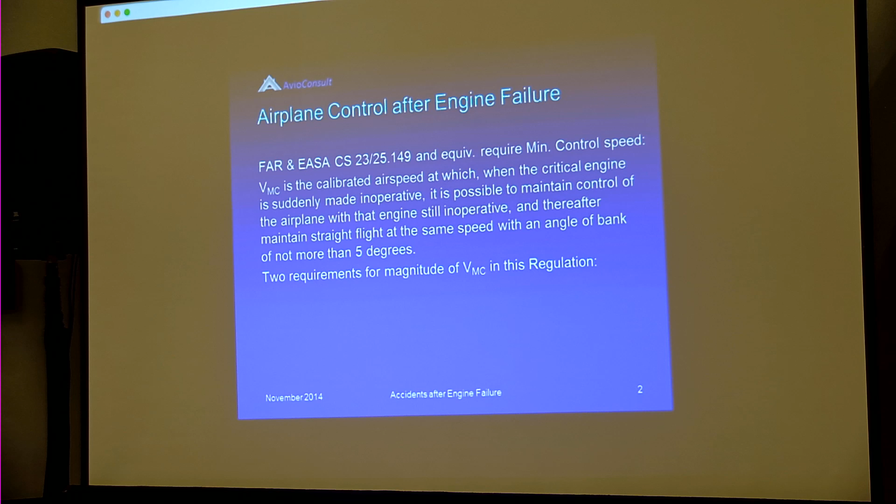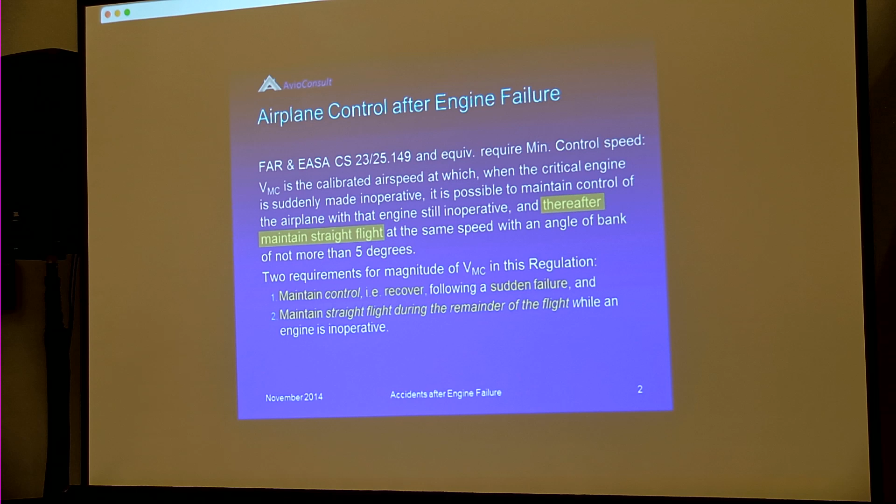It is possible to maintain control of the airplane with that engine still inoperative and thereafter maintain straight flight at the same speed with an angle of bank of not more than 5 degrees. There are 2 requirements for the magnitude of VMC in this regulation. The first is maintain control, that is recover following a sudden failure, and number 2 is maintain straight flight during the remainder of the flight while an engine is inoperative. Please notice that there is absolutely no requirement for maintaining control during turns at airspeeds as low as VMC, only for straight flight.

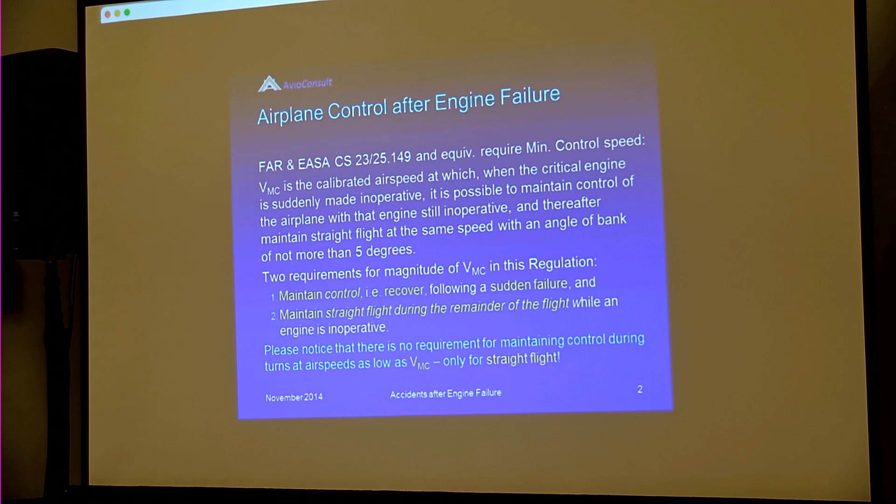VMCA for minimum control speed in the air will be used in this presentation rather than VMC. VMCA is more commonly used today to distinguish between other VMCs. The VMCA of an airplane is published in the limitations section of its flight manual. VMCA is also presented with a red radial line on the airspeed indicator, or on equivalent electronic displays, or on a placard in clear view of the pilot and as close as possible to the airspeed indicator, for heavier and turbine-powered Part 23 airplanes. The blue line speed is VYSE, the airspeed for maximum rate of climb with a single engine.

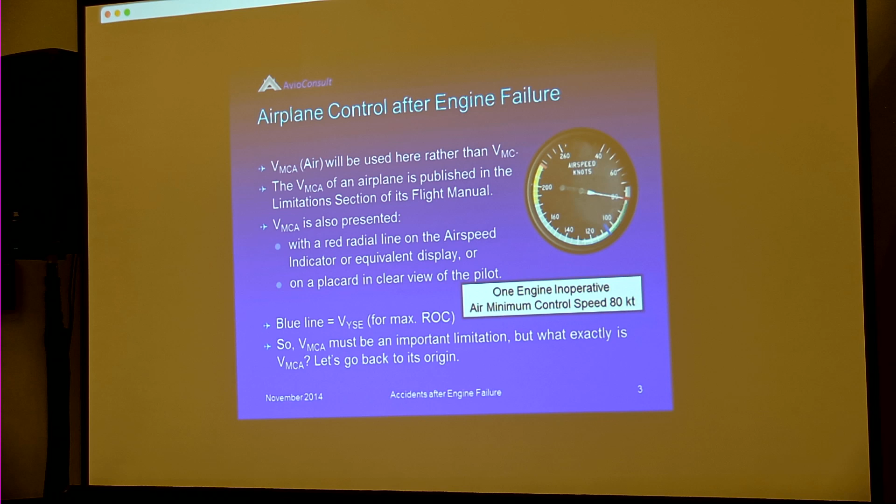So VMCA must be an important limitation. But what exactly is VMCA? Let's go back to its origin.

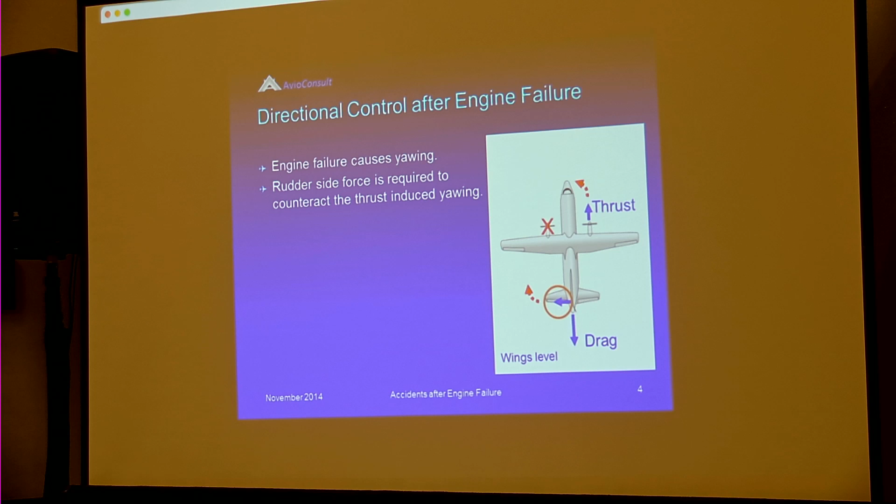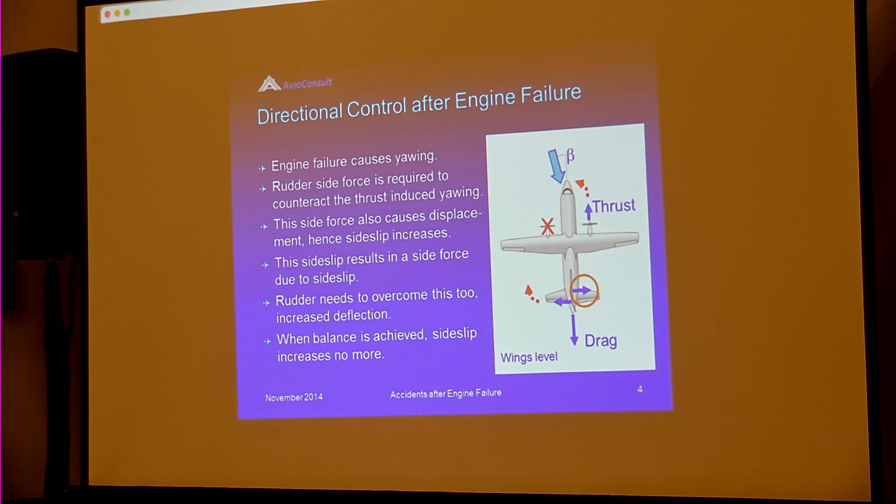Directional control after engine failure. Engine failure causes the airplane to yaw into the failed engine. A rudder side force is and stays required to counteract the thrust-induced yawing moment. This rudder side force also causes displacement to the dead engine side, hence a side slip starts to increase. This increase in side slip results in an increasing opposite side force due to side slip caused by the fuselage and the vertical tail. The rudder needs to overcome this side force too, increasing the required rudder deflection. When a balance of side forces is achieved, the side slip increases no more. There is a minimum airspeed to generate the required side force for balancing the thrust yawing moment and the side force due to side slip. We'll get to that later.

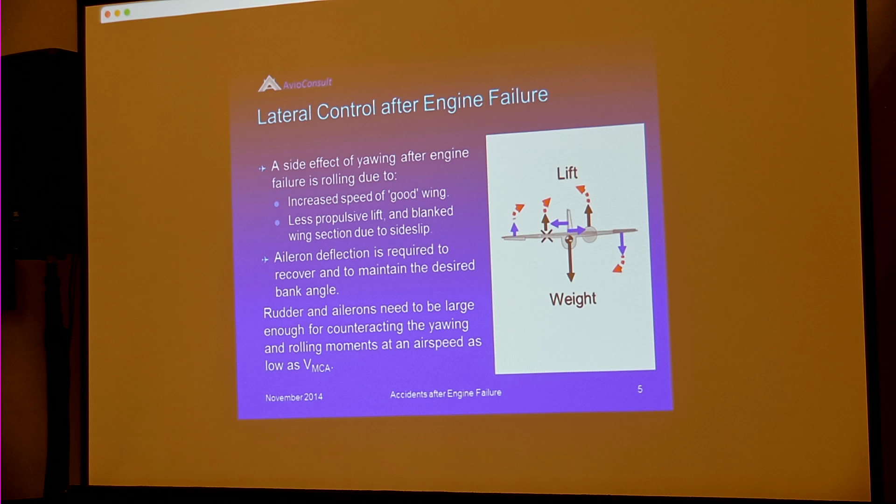When, after engine failure, the wings are kept level, a side slip cannot be avoided. However, side slip causes drag, and drag degrades the climb performance. Especially when an engine fails immediately after liftoff, you need maximum available climb performance, and hence you would select maximum thrust on the good engine, and you would like minimum drag by reducing the side slip angle. This can easily be achieved, as I will show you later. The rudder and the ailerons are the only aerodynamic control surfaces available to the pilot for maintaining an equilibrium, a balance of forces and moments after engine failure.

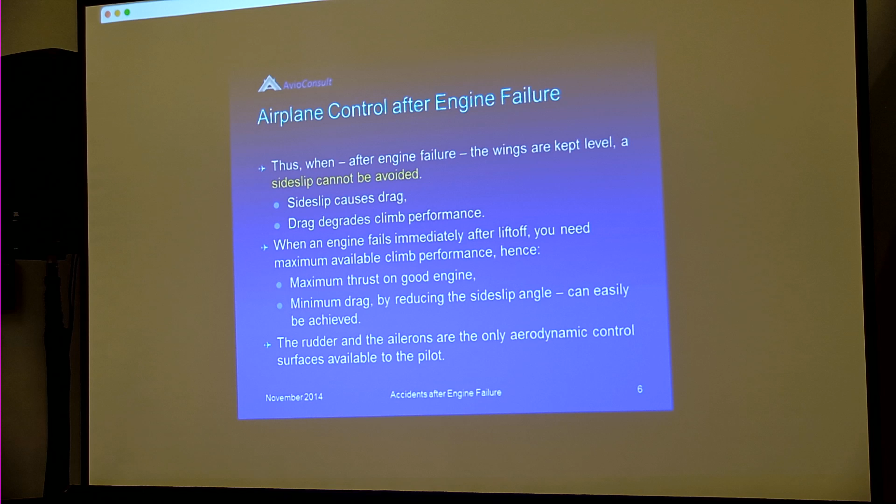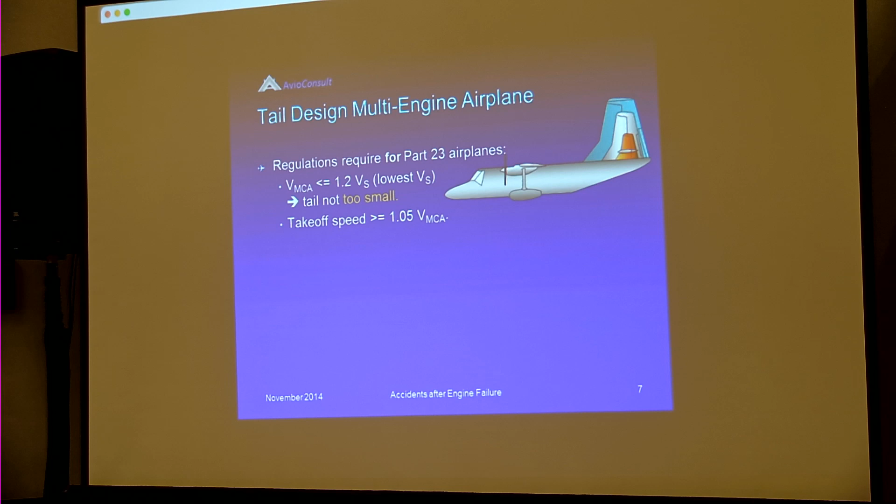A few words on tail design. Aviation regulations require for Part 23 airplanes a VMCA less than or equal to 1.2 Vstall, so the tail cannot be made too small. The takeoff speed must be greater than or equal to 1.05 VMCA, a 5% safety margin above the minimum control speed. This bank angle also has an effect on the minimum control speed.

The design engineer calculates this graph during sizing of the vertical tail of this sample airplane. The graph shows VMCA and side slip versus bank angle when the left engine, number 1, is inoperative. When the wings are level, VMCA is calculated to be 120 knots and the side slip is 14 degrees, which means a lot of drag.

For zero side slip, that is minimum drag, the bank angle needed is 4 degrees. VMCA will then be 95 knots. This is the design VMCA of the airplane that will be verified during flight tests.

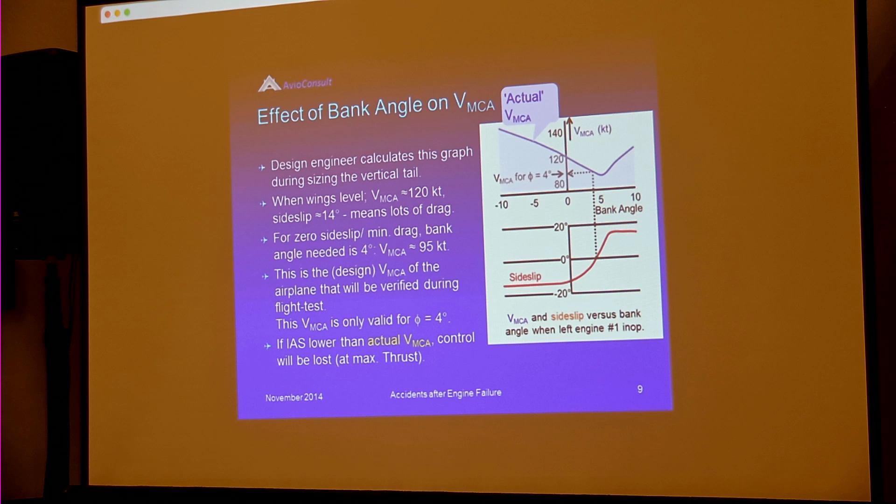This VMCA is only valid if the bank angle is 4 degrees. This blue line shows the actual VMCA, being the VMCA that the pilot would experience in flight for changing bank angles. The actual VMCA increases when the bank angle is smaller or larger than the favorable 4 degrees bank angle for this sample airplane. If the indicated airspeed is lower than the actual VMCA, the shaded area, control will be lost at maximum thrust.

Remember, both VMCA and side slip, that is drag, increase if a small bank angle away from the inoperative engine is not maintained. The banking is to the same side as the leg pressure on the rudder pedal.

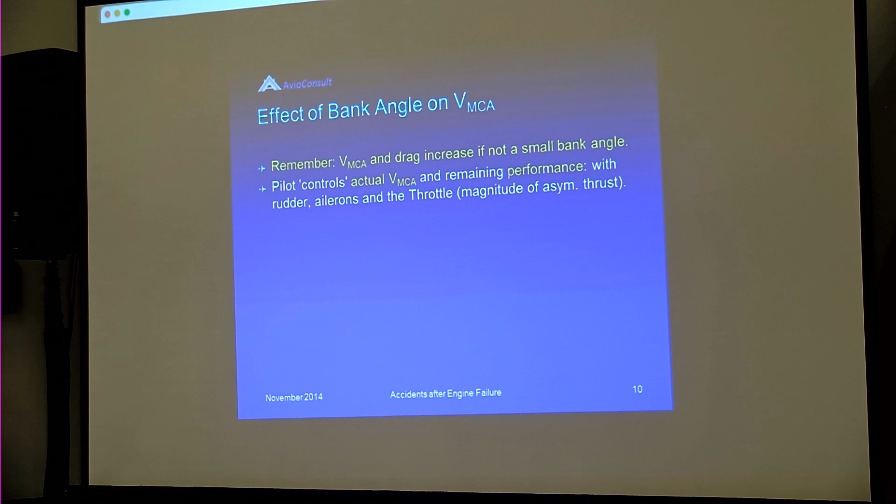The pilot controls the actual VMCA and the remaining performance with rudder, ailerons and the throttle, the magnitude of the asymmetrical thrust. If the rudder is not up to maximum for maintaining the heading, we also call that partial rudder, a higher airspeed is required. The actual VMCA is higher.

If the ailerons are not up to maximum to prevent rolling, a higher airspeed is required. The actual VMCA will be higher.

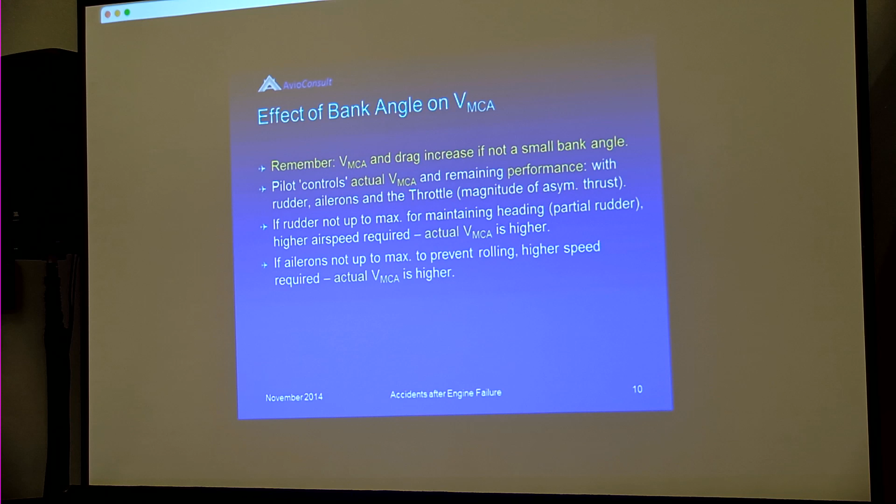If the airplane keeps yawing and or rolling despite maximum rudder and or aileron, the only option for the pilot to prevent loss of control is to reduce the thrust just a little. Then the asymmetrical thrust is lower and less rudder is required to counteract. The actual VMCA will be lower.

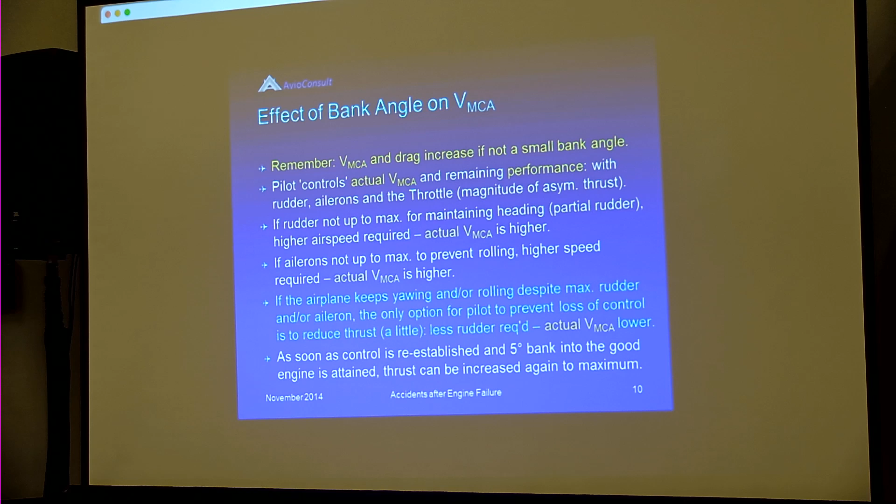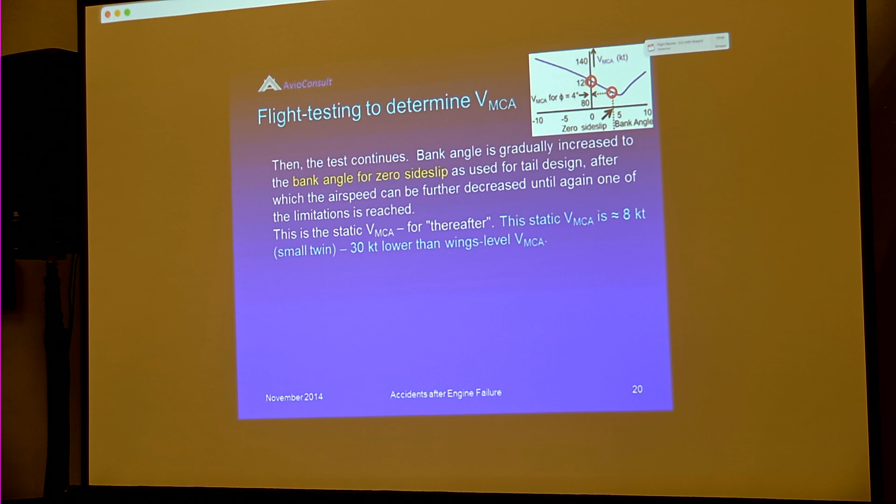This static VMCA is approximately 8 knots lower for a small twin and 30 knots lower for a 4-engine turbofan, than wings level VMCA. These 2 points are the only test points during flight testing to determine the static VMCA.

But the aviation regulations require another test to be conducted, the dynamic VMCA test, during which the critical engine is suddenly made inoperative at decreasing airspeed test points. The aviation regulations require that the deviations from the flight path in yaw and roll must stay within certain limits, and an average pilot must be able to recover the airplane.

The highest of static and dynamic VMCAs, which is usually the static, will be published in the airplane flight manuals, the standardized VMCA of the airplane. This VMCA is always safe, even when the thrust is or is increased to maximum, provided straight flight with 5 degrees of bank into the good engine is maintained.

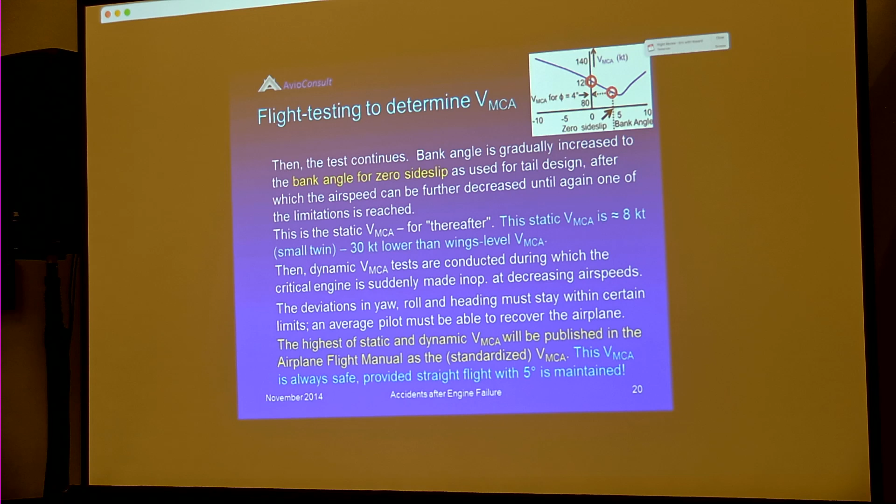Takeoff speed, small twins. I repeat it once more: keeping the wings level increases VMCA to a higher actual value. The increase is approximately 8 knots for a small twin.

The takeoff speed of small twins is required to be 1.05 times VMCA. This 5% safety margin is, however, not high enough. Since the wings are level at liftoff, it is recommended to use at least 1.05 VMCA plus 10 knots as a safe takeoff speed for a small twin.

Ask the manufacturer of your airplane for the wings level VMCA so that you can add a 5% safety margin to that speed.

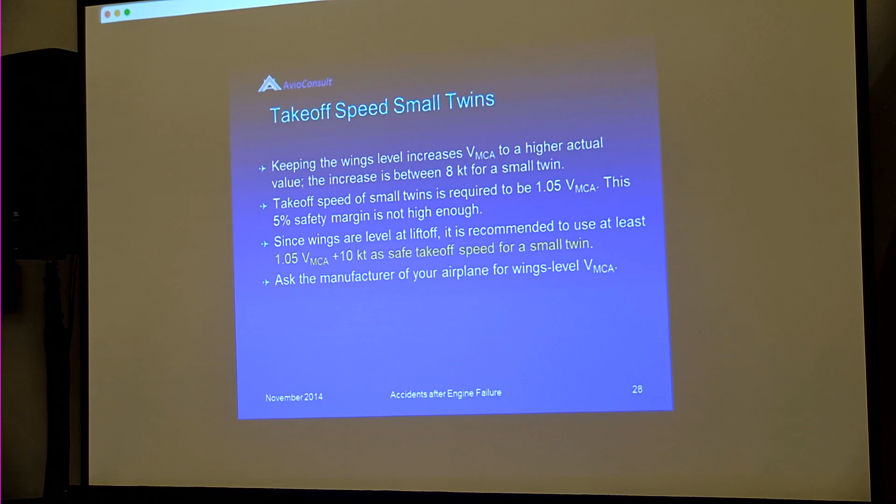Following engine failure, attaining 5 degrees of bank away from the inoperative engine should never be delayed, because bank angle is required for both performance and control.

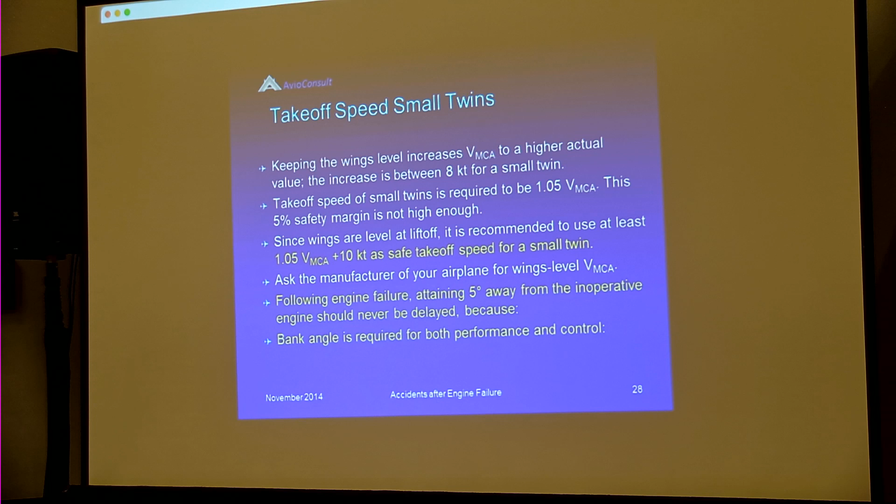We'll now review the 2 accidents shown in the beginning again and show you what happened.

Now the view from inside the cockpit from the left seat. The takeoff run starts.

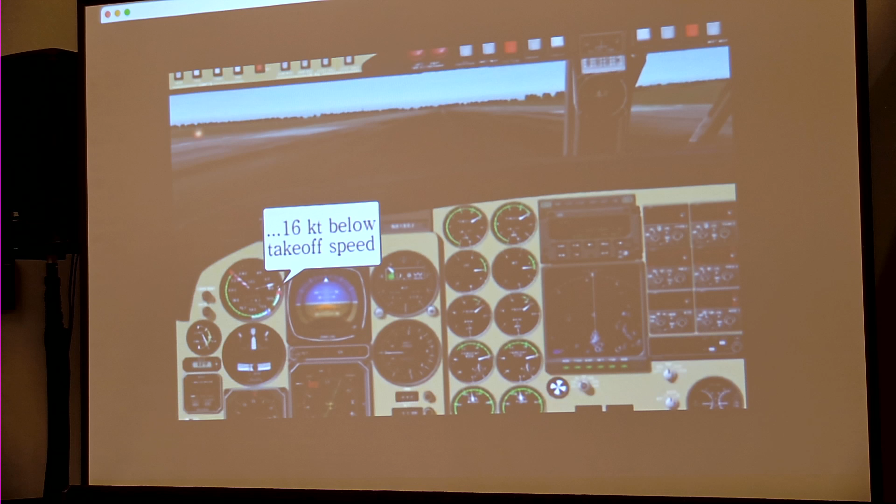Everything looks all right. Rotation is at 75 knots, 16 knots below the takeoff speed of 91, 12 knots below the red line VMCA, and even 20 knots below actual wings level VMCA. Right after liftoff, engine number 2 failed at an airspeed of 82 knots below the red line VMCA. The loss of control was a fact.

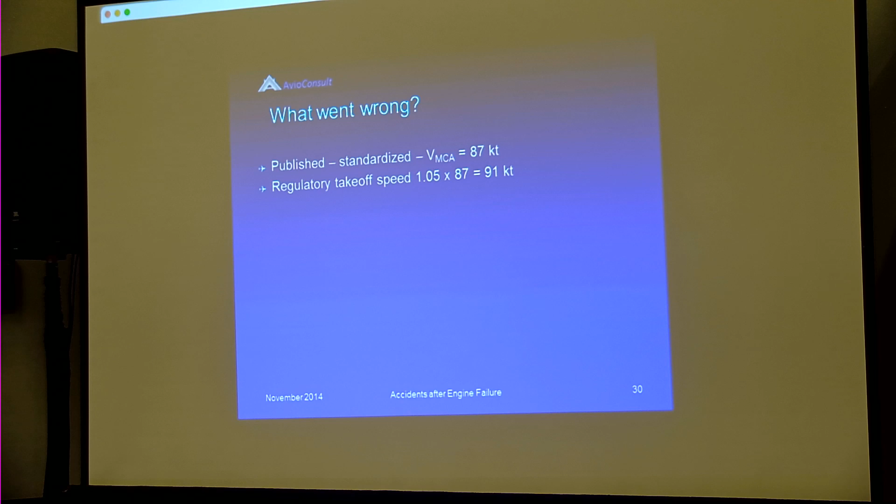What went wrong on this accident? The published standardized VMCA in the flight manual was 87 knots. The regulatory takeoff speed would then be 5% higher, is 91 knots. The actual VMCA at rotation with the wings level is 87 plus approximately 8 knots, is 95 knots. The pilot rotated early at 75 knots, 16 knots below takeoff speed and 20 knots below the actual wings level VMCA. Way too early. The right non-critical engine failed at 82 knots, 5 knots below VMCA and even 13 knots below actual VMCA. The ailerons were either not maximum or not effective enough at too low a speed.

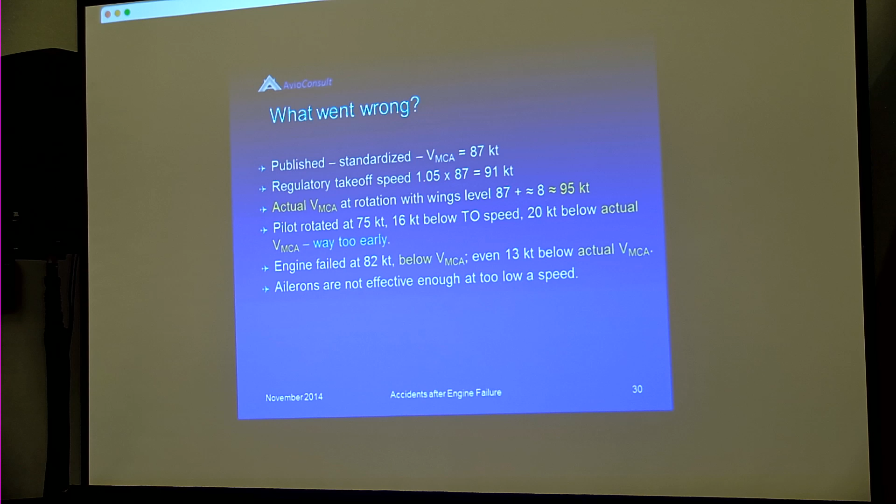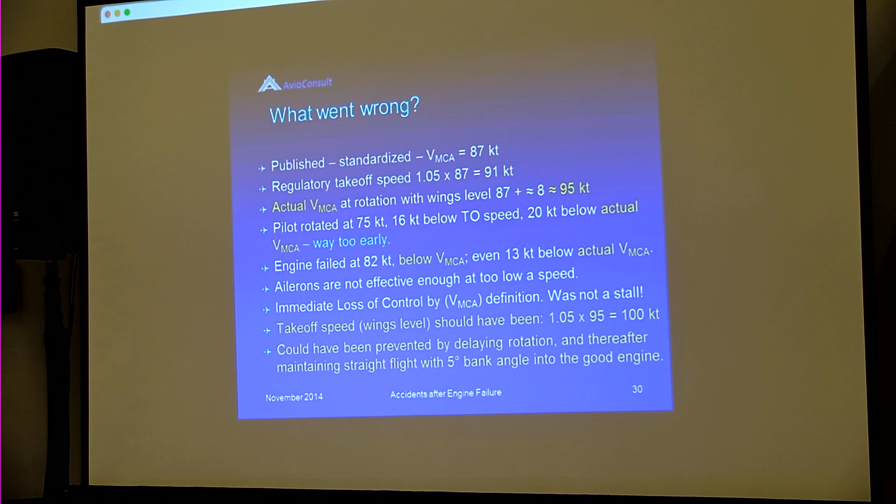There was an immediate loss of control by VMCA definition. It was not a stall. Takeoff speed with wings level should have been 1.05 times the wings level VMCA. That is 1.05 times 95 is 100 knots at least. This accident could have been prevented by delaying rotation until the airspeed was 100 knots, and thereafter by maintaining straight flight with 5 degrees of bank into the good engine.

A few do's and don'ts. Always delay rotation until the indicated airspeed is at least 10 knots higher than the takeoff speed. After engine failure, bank 5 degrees as soon as possible to the same side as the rudder pressure. Always maintain straight flight until reaching a safe altitude. Maybe that should be at least 1,000 feet. When a turn is required, reduce asymmetrical thrust and the rudder a bit and make a shallow turn. You might lose some altitude because of the drag. When the rudder is near maximum, the actual VMCA and the loss of control are close. Increase your speed.

Before increasing the thrust to maximum, when the airspeed is low, bank 5 degrees again into the good engine. During cruise with one engine inoperative, fly VYSE plus bank 2 to 3 degrees for minimum drag and for minimum descent. A long straight-in approach is much safer than increasing the thrust during the final turn for landing for maintaining the approach path. When the airspeed is low, never ever increase thrust to maximum without banking 5 degrees into the good engine first, and thereafter maintain straight flight with that bank angle. Increase the rudder and the ailerons with the thrust.

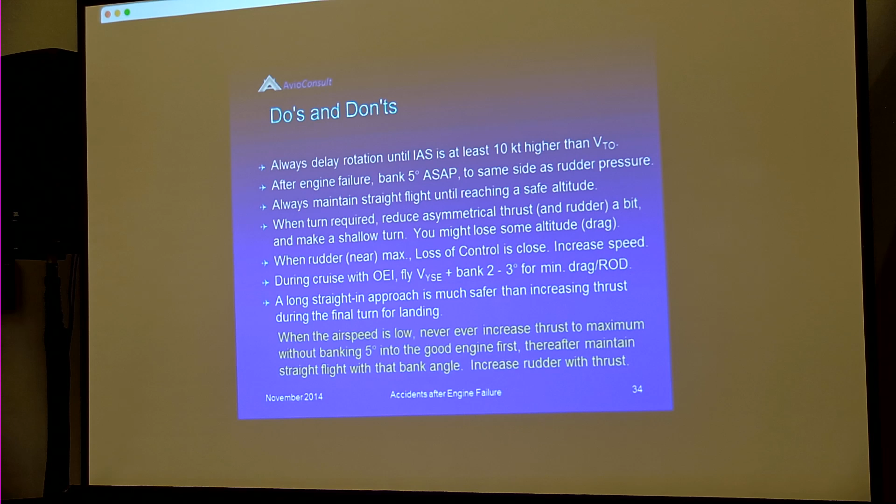Pretty amazing when you watch that airplane basically snap roll right into the ground. And I don't think there's anybody alive who could recover from that, especially with how poorly the takeoff was managed and how slow that rotation actually occurred.

I figure out which direction I'm going. So what got me going, and a lot of the topics that I come up with are based on curiosity, and this was one of those to where I'm looking at the different POHs because I'm flying different airplanes, and I'm looking at the performance charts and looking at takeoff speed. And I go, why are they so different? And you go back to the 600 as an example, and I'll show you the charts here in a second, and I go, why is that the way it is?

Takeoff speed, 85 knots, 1 knot above VMC. So you know if you get off the ground, you're doing 85 knots, you lose an engine, you're gonna lose control of the airplane. So why did they do that? And just based on the numbers that the colonel's talking about here, takeoff speed should be 5% above VMC, and that puts it at 88 knots. And VMC assumes 3 to 5 degrees of bank into the good engine, and at rotation, the wings are level. So we've got to add that extra safety margin of 8 knots. So 88 and 8 is 96. And what all the instructors in here that I'm dealing with regularly, we're all teaching rotate at 95.

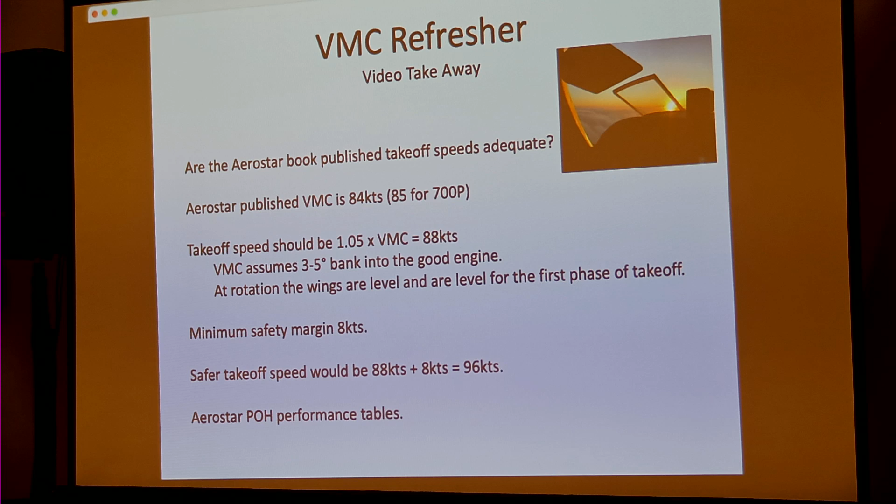And the note that I was making, based on what he's talking about here, about the control and making sure you have 3 to 5 degrees of bank into the good engine. Not only that, 3 to 5 degrees coincides with about 200 feet a minute in climb rate. And in 601P on a warm day, moderate load, it can mean the difference between 50 feet a minute down and 150 feet a minute climb. That's all the difference in the world.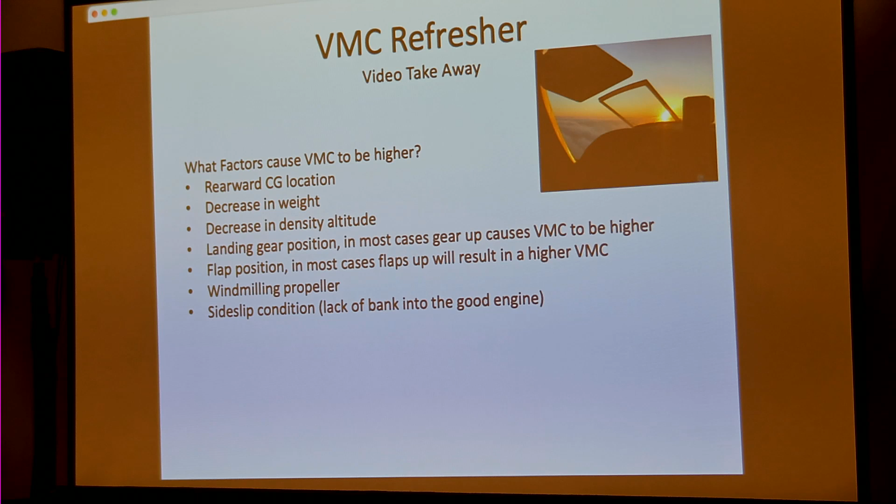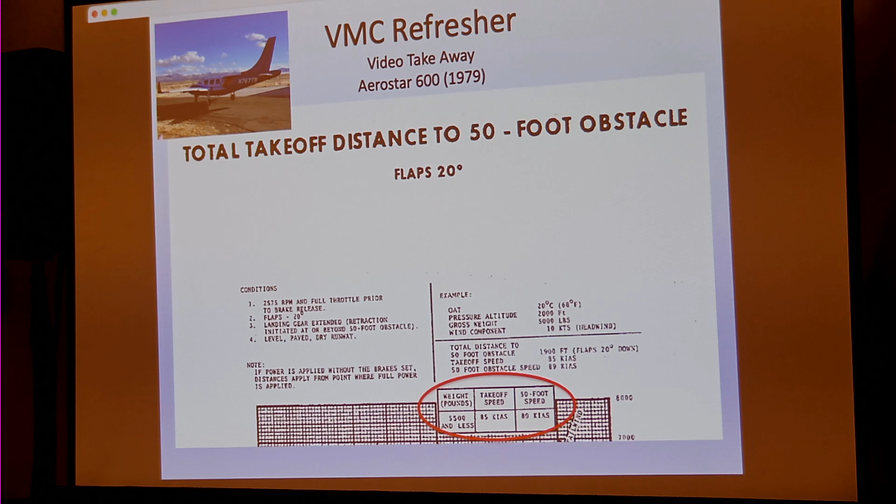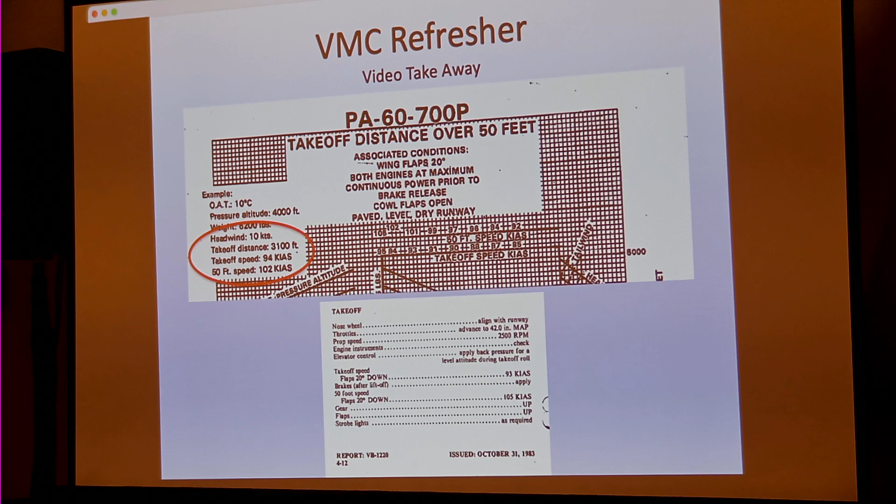The other thing I wanted to point out - light twin takeoff, control, and performance briefing cards are available. You can Google them online, they're PDF files you can print out. Highly recommend doing this periodically, not necessarily every flight. If you're going out of the same airport, conditions are pretty close, but going out of airports that are higher, especially, know what your best rate of climb is with one engine. Know what the service ceiling is so you have that information ahead of time, so there's no hesitation in deciding what to do after you've lost an engine.

A great example - the 700s are fantastic with performance, but if you fly them at gross weight, 6,850, you get the same issues you do in a 601P on a hot day, high density altitude. Coming out from back east last summer, we were in Great Falls, Montana - hot day.

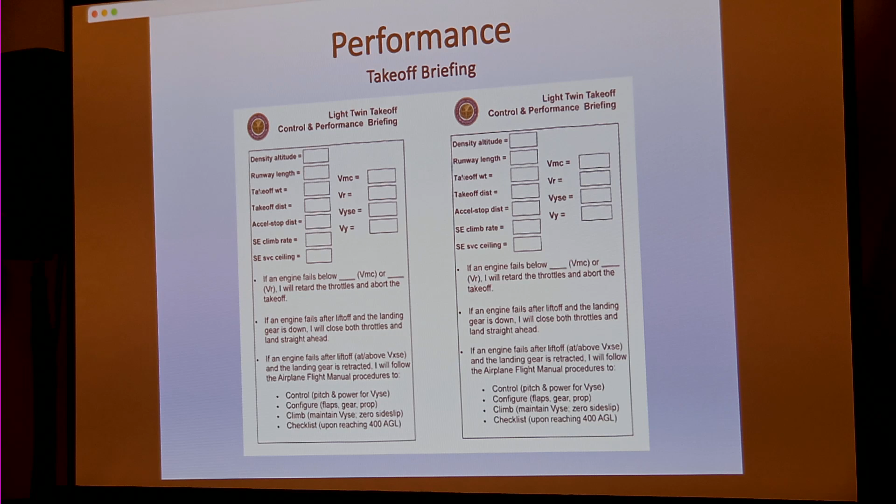We were thinking, well, let's put another 44 gallons of fuel in the airplane, it's cheap here. Then we looked at the takeoff performance - if we lost an engine, 50 feet a minute on that day with the 700, loaded at gross weight. Take 250 pounds out that we didn't need, and it went up to almost 200 feet a minute. That's a big margin, and the airplane's fine at 200 feet a minute - you can climb around and get back to the pattern. So think about those things before you're just jumping in the airplane and taking off fat, dumb, and happy.

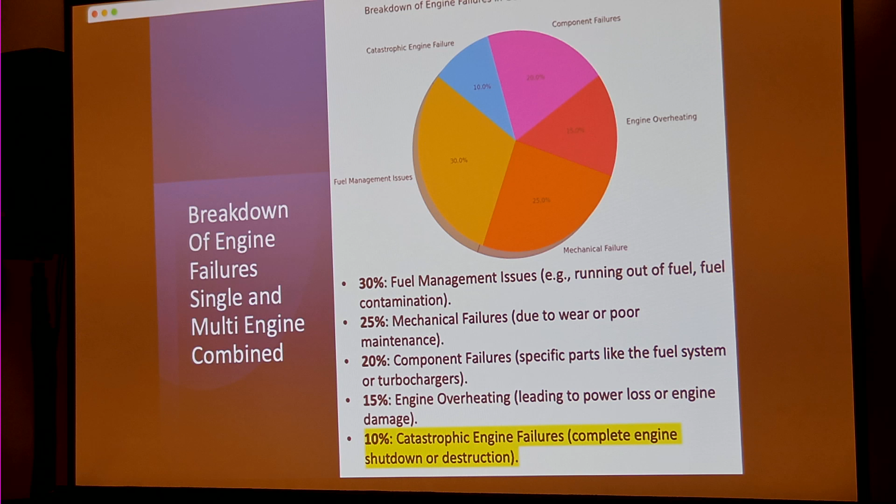So curiosity got me thinking about engine failures, and I went out and did some basic research online, finding information that AvWeb, AOPA, and NTSB published. I was thinking, what's the breakdown of engine failures for all single and multi-engine general aviation airplanes? This isn't breaking twins and singles down per se, but just: how often does an engine fail? And I was curious specifically about catastrophic engine failure.

So: 10% catastrophic, 30% fuel management issues, 25% mechanical failures, 20% component failures, 15% overheating - most of that due to oil starvation - and then 10% catastrophic engine failures, meaning a complete engine shutdown or destruction.

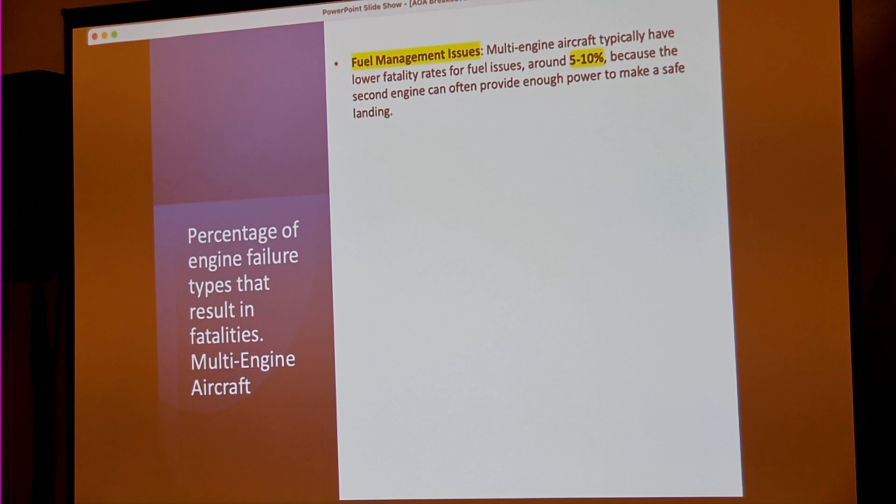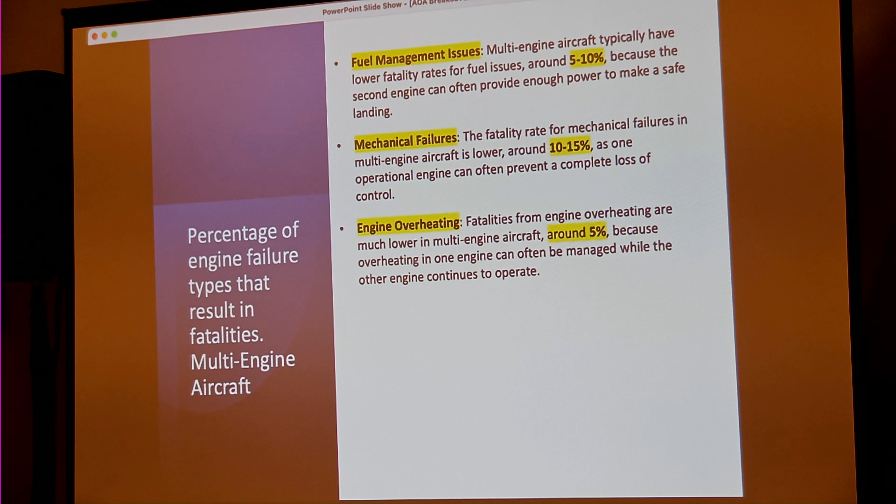And jumping further - what percentage of these engine failures actually result in fatalities? Fuel management issues, only 5 to 10%. Mechanical failures, 10 to 15%. Engine overheating, 5%. Component failures, 10%. Catastrophic engine failures - now this is in multi-engine aircraft - 30%.

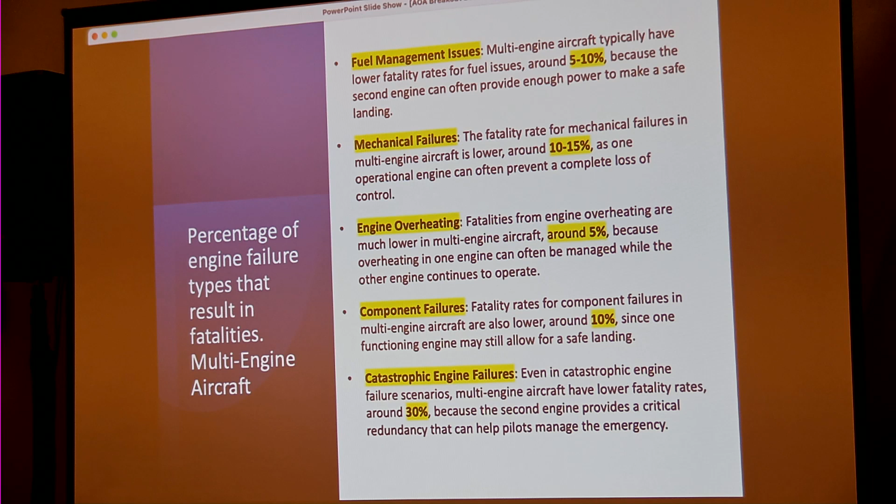It's pretty high. I mean, 30% of the time that you have a catastrophic engine failure, across all phases of flight, it's going to result in fatalities. It's too high, and I think there's a lot of things we can do to help solve that problem.

Differences between singles and twins.

This one I found interesting because there's a lot of stuff out there about singles still being safer than twins, and twin engine airplanes being more dangerous, that you're more likely to get killed in a twin. Not so. Single engine fatality rates: fuel management 25%, engine failures 30%, engine overheating 15%, component failures 25%, and catastrophic engine failures in single engine aircraft result in fatalities 60% of the time. That kind of does make sense because they're flying singles over the mountains at night in icing conditions and all that kind of crazy stuff.

Multi-engine rates: fuel management 10%, mechanical 15%, engine overheating 5%, basically about half. And the multi-engine fatality rate on a catastrophic engine failure is 30%.

Based on data from NTSB and other sources, approximately 100 to 150 accidents annually. You can do the math and figure out how many fatal accidents in twins are caused by catastrophic failures. It's about 30 of them. I went back and looked up how many failures happened in twins over the last couple of years, and I think there were 34 in 2023. So it's pretty close, and that's my smell test, whether the numbers I'm getting off the internet are correct.

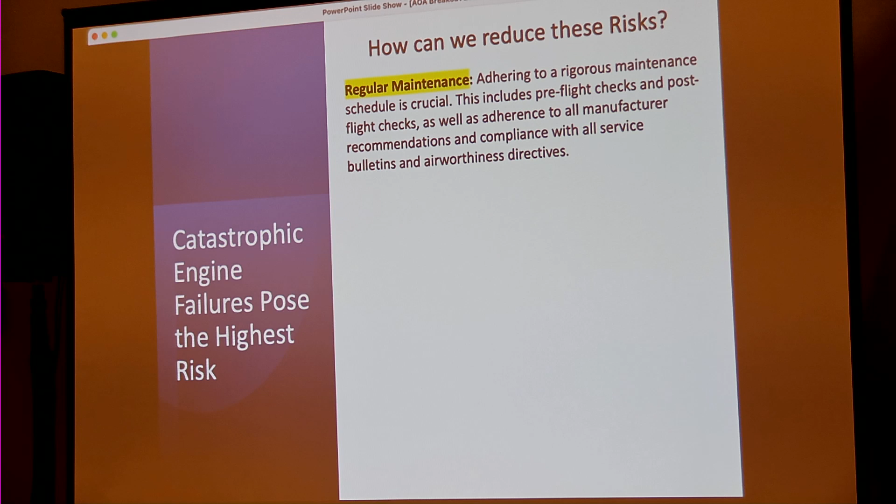And don't let anybody fool you. If you put the time, effort, and money into it, you're going to have a very safe, reliable airplane, even with the Aerostars, as complex as they actually are.

Thorough pre-flight planning and looking at your contingencies. Where are you going? What's my performance of the airplane going to be?

Proficiency training, I'll talk a little more about this later, but we're not doing enough. The insurance companies are requiring annual recurrent training, in some cases every 2 years, in some cases none. That's something we really need to think about, and this talk about simulators being available is really going to help, especially getting people to go in. Instead of spending $1,000 an hour flying your Aerostar around, you can spend a couple hundred dollars an hour flying a simulator and at least get the drill down.

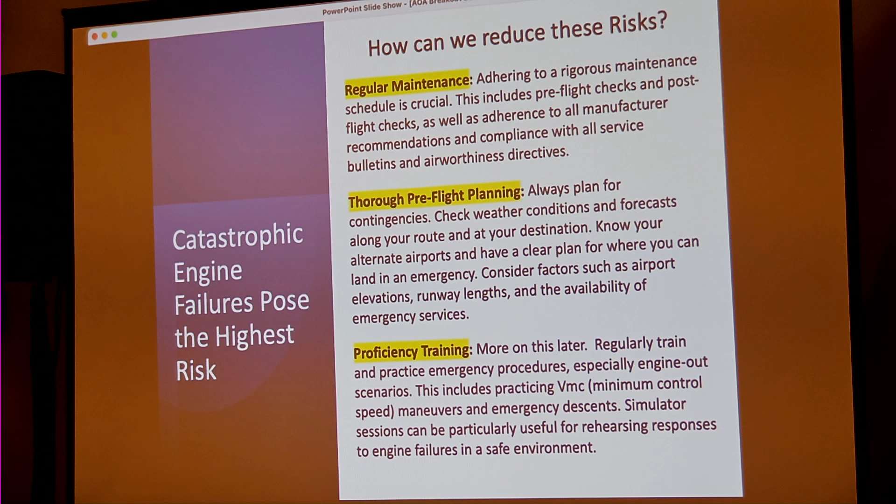Understanding the aircraft's performance charts, like Ken just mentioned, is super important, but you need to understand how to use them. Critical altitude awareness, this is where your single engine service ceiling comes in as well. If you just take off somewhere on a cross country and haven't really looked at or planned out what it is, and you do have an engine failure in cruise, you have a much higher chance of a safe outcome if you actually know what that single engine service ceiling is, and if you need to turn around. A lot of people say they'll keep going to their destination or another airport, but can you actually make it?

Fuel management, I don't think I've heard of any fuel starvation except for the ones that happened way, way back in the Aerostar. Most of us are pretty good with that, but this is in general.

Use of checklists. In my training, I see a lot of people start to get complacent on that. They use a flow, which is great, but a flow in combination with the checklist, like the airlines do, is your best bet.

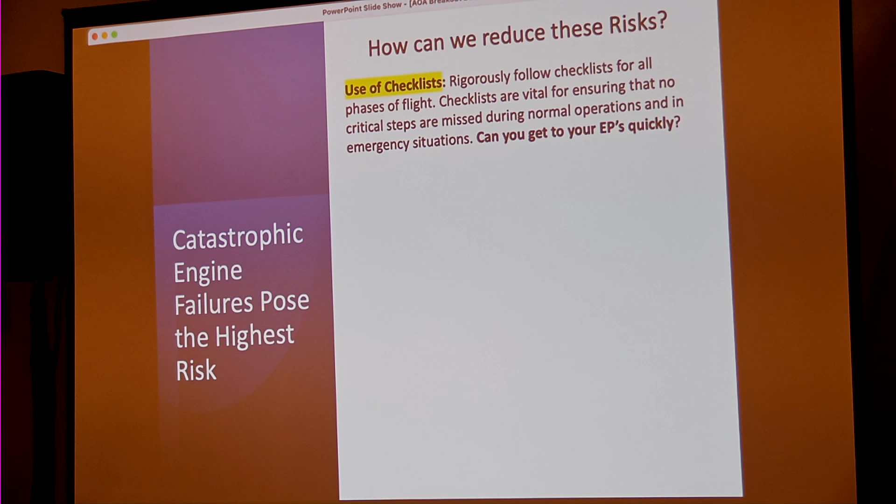I needed a checklist for my stupid cell phone up here that I was going to record this on, and guess what button I didn't push? Record. So it's even simple things, as we get distracted, oh I gotta get up there, I gotta plug it in, I gotta make sure it's going to show up on the screen and everything, got distracted and didn't push the button.

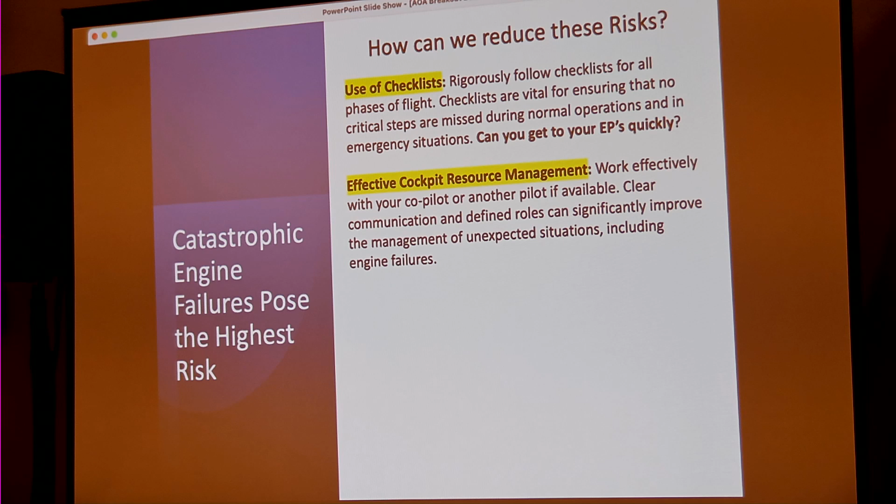Effective cockpit resource management, CRM, which the airline guys all know what that is, but with us in the airplane, it's managing where's our stuff, can we get at it easily. If I have somebody sitting in the right seat, whether it's a friend or your wife or husband or whatever, you can still utilize their eyes, ears, and help in controlling and working through an emergency situation.

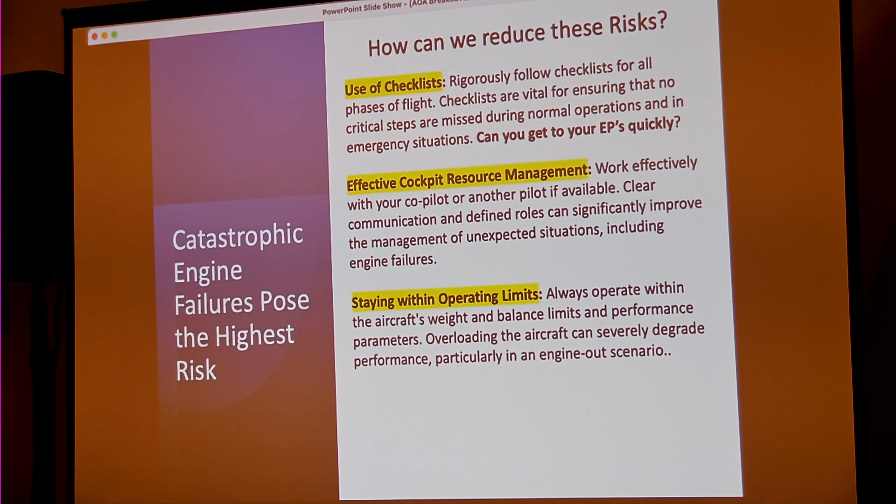And then staying within the operating limits. Like I just mentioned with the 700s on a hot day, I don't need to carry that extra fuel, and don't carry it. The airplane performs fine at gross weight, except if you lose an engine, it's going to be a handful. So how do we reduce the risks?

Well, not all of us are A&Ps. We don't need to know what's causing an issue, but what we do need to know is to be aware that there is something going on. What's different? Has something changed?

I was talking about this last night with fuel flow. It was Joel Stout, and we're just talking about engine failures and that sort of thing. He's watching in an airplane the fuel flow continue to rise and continue to rise. The engine's running fine, and then, wait a minute, it got really high. It got up to about 50 gallons an hour. And you go, I think I better shut this engine down. It turned out the fuel was leaking and being dumped inside the nacelle. Well, that's a fire hazard.

We'll talk about shutting engines down here in a minute.

Engine analyzer data. There are a few of you out there still flying Aerostars with stock engine temperature gauges. You've got one CHT. What cylinder is that on? Three, yeah. Okay, well, I think most of them are on 3. Supposed to be the hottest one. Well, actually, of the ones that I've flown, I think I've flown probably 30 or 40 of them now, and it's been on 3.

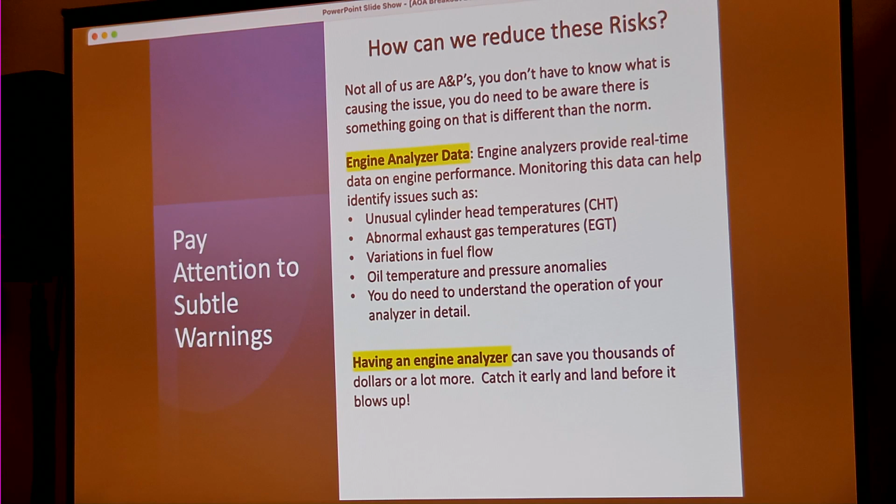You'll never know it. And the example we're going to show in here does have an engine analyzer. We've got all the data and everything, but if we didn't have an engine analyzer, the pilot would have never known this was going on until the engine actually self-destructed. Basically, having one can save thousands, if not more, if you catch things early.

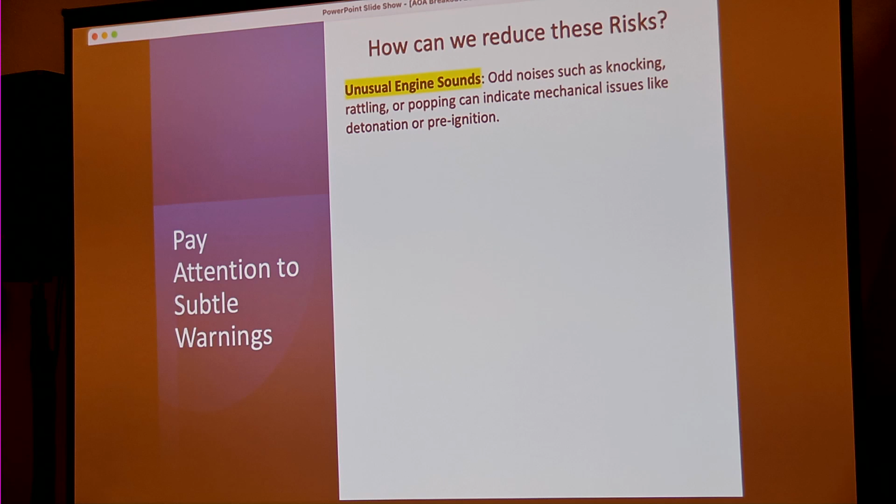Unusual engine sounds. Use your ears, use your eyes, your nose, your senses, vibration, your butt. All that stuff comes into play. I'm not going to go through these in a bunch of detail because I'll go over my time limit. But how many times have you been out there and you go, this engine's vibrating more than it's supposed to? Is it the prop phasing or is it something else?

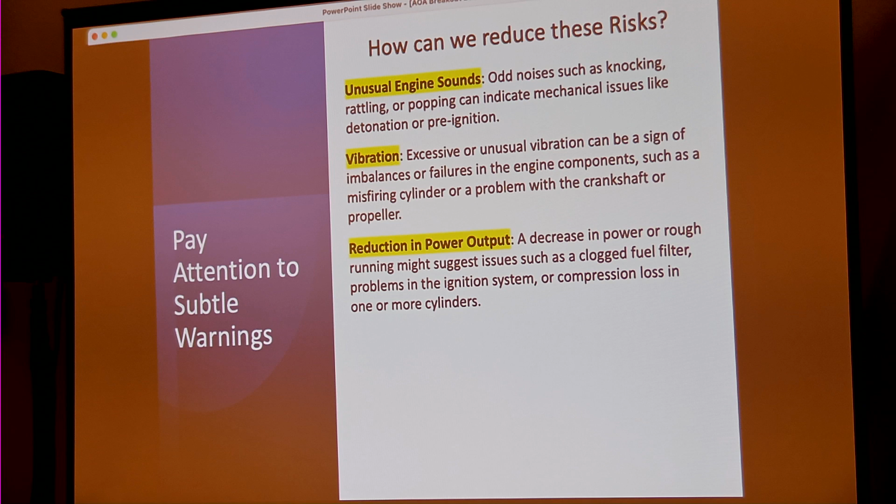Reduction in power output. Here's one that a lot of us have had happen. You're flying along in the flight levels and you're running at, say, 30 inches of manifold pressure, and all of a sudden you hear this kind of a thumping pop, and your manifold pressure's down around 10. What happened? Yep, so you all of a sudden have a normally aspirated engine up there. Now, what do you do about it?

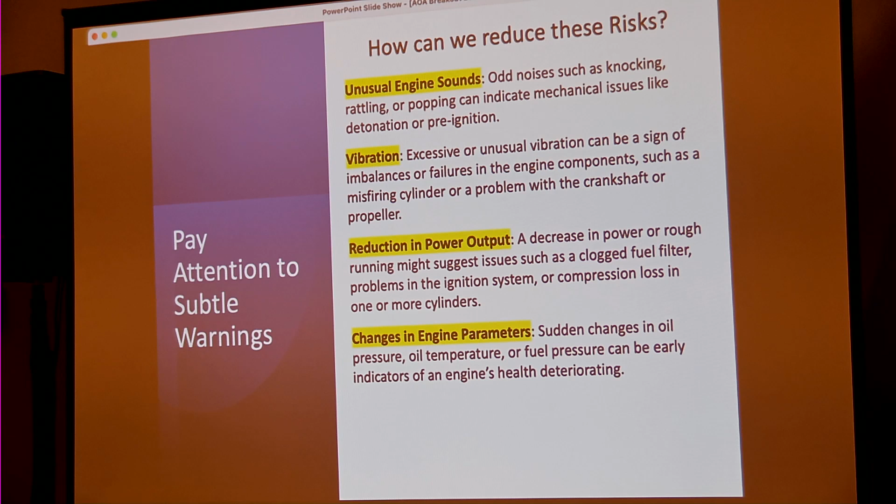Changes in engine parameters, sudden changes in oil pressure, temperature, fuel pressure, like Joel's situation with fuel pressure changing. What does that mean to you? What should I do? Fuel and oil consumption.

This has to be done on more of a longer term basis where you're tracking. And I know that if you want to learn how to track stuff on your engine, talk to Brennan, because he's definitely an analyst and has the charts to prove it. He could tell you probably to the tenth of a quart how many quarts per hour he burns in his airplane, which is great to know because if it starts to change, that's telling you something's happening.

And then visual inspection of the exhaust. You can tell a lot by just looking at the color. Is it real black? Is it kind of gooey or oily? That could mean you've got an oil leak, or you could have blow-by on the cylinders, or is it nice and dry and gray?

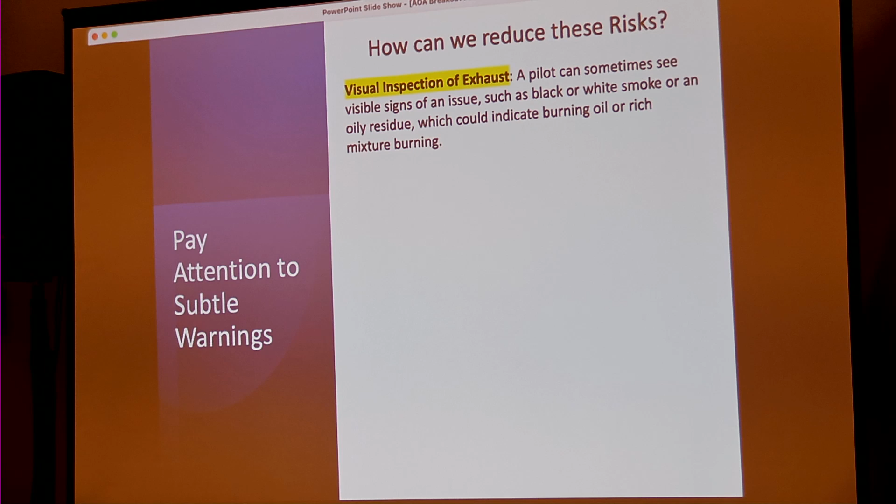And then there's some that have the magnetic plug inspections, and the sump filters, or the sump port screen, doesn't get checked as often as it probably should. Regular maintenance, including your pre-flights, being attentive, and monitoring things during flight are crucial.

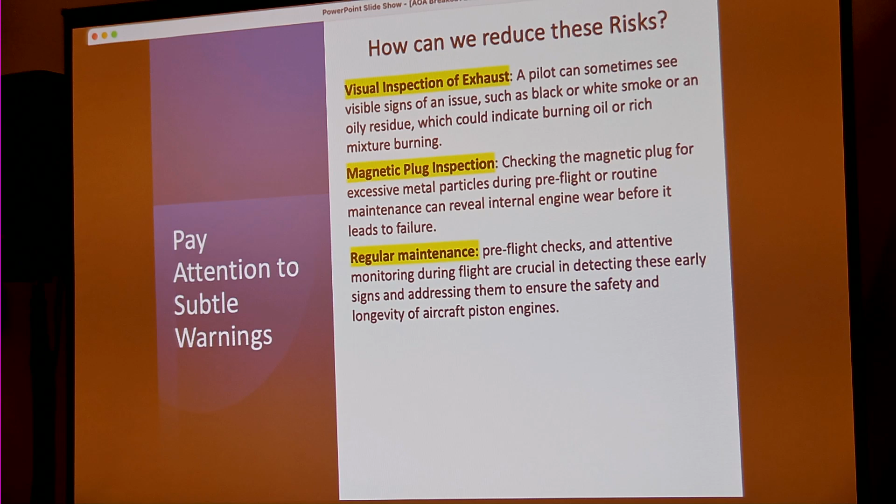And then practice. This one's going to be open for discussion because everybody's a little different. But in my opinion, the question is, why do we think we can do engine-out drills once every year or two and think we're safe? We're not. I've proved it myself, gone out in a simulator and thought, well, the airline guys do these V1 cuts.

Let's go see if I can handle the airplane, lose an engine at 50 feet in the fog. I basically went and did a 0-0 takeoff, which is legal under Part 91, not very smart, but can I handle it? The answer was no — I didn't die, but I broke the airplane. It took a few tries to kind of get it down. This was in a 421 simulator.

Practice. Now we're not going to go do that, but that's just one of those curiosity things — spend more time during your recurrent training and practice this stuff, so we don't have to go up and do it in the airplane seven or eight times before you get it down.

There's going to be a lot of talk about simulators, and I know Zylan's here, who I've met out of Seattle, which Ken mentioned, about the simulator stuff. The simulators are good, and they're going to help a lot, but they're just not the same thing. So it's a combination of mostly simulators and going out and doing the single engine work in the airplane in a safe environment — safe for the pilots and the aircraft — that's actually priceless and invaluable, because you just don't get the same feeling.

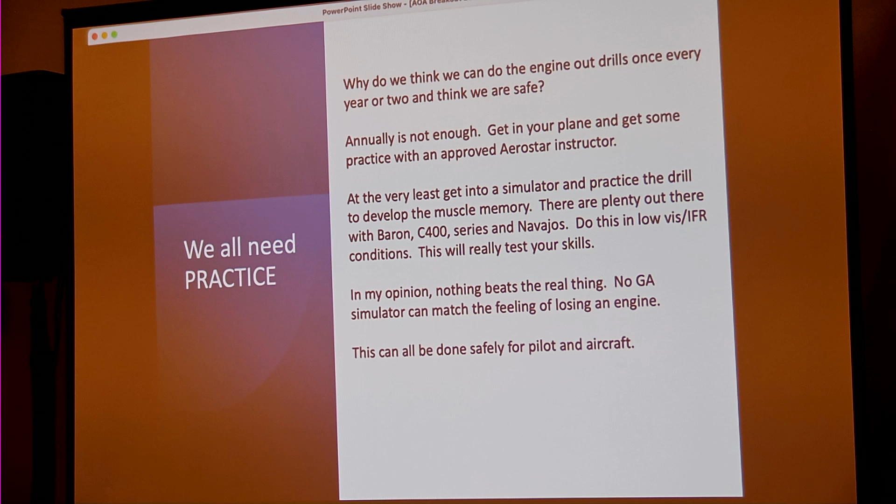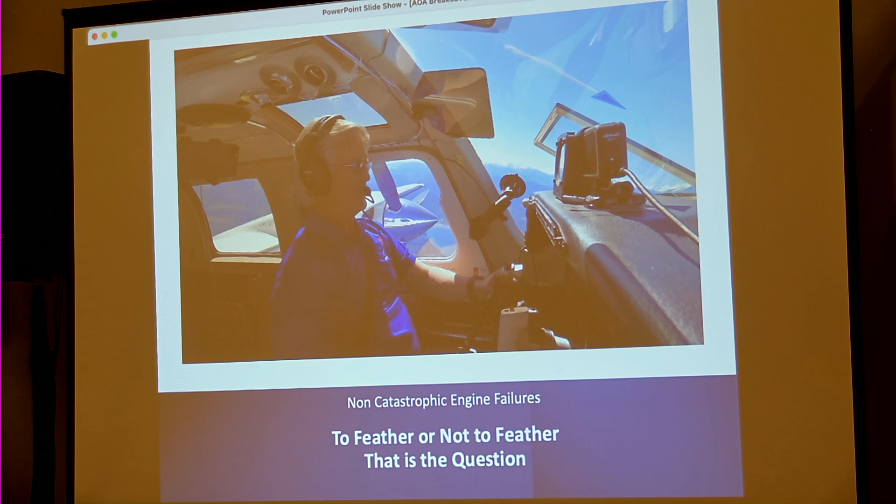Throttle back. And that's good. Left coming back, feather. And that did feather, so that's good. We're still doing about 130, and we're climbing at 400 feet a minute, get the blue line, got that 3 to 5 degrees of bank in there.

So it's just kind of showing that the airplane's easy to control, and it will climb. We were at about, I've got a 6,850 gross weight airplane, so we were at about 6,400 pounds at this time. I had two 250-pounders with me, and pretty much full fuel.

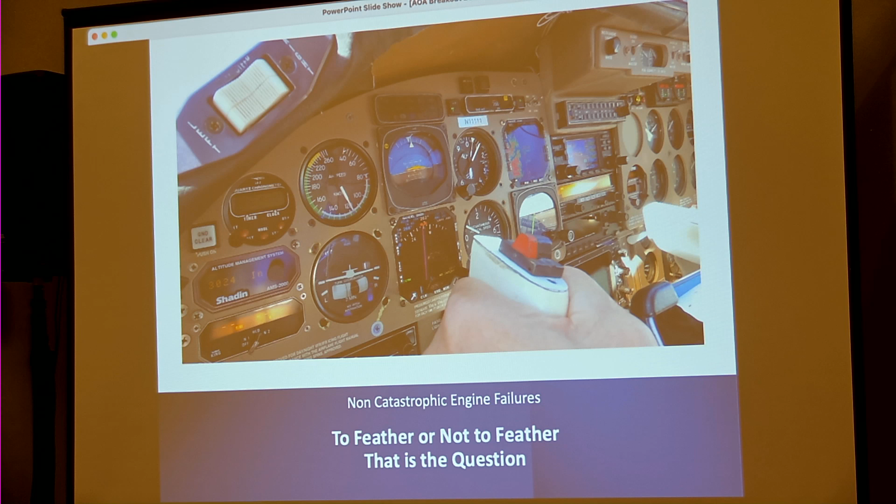So this you guys have already seen. Brennan published this, and it's fairly recent, from the NTSB safety alerts. There's only one piece that I really want to cover in here, because we'll talk a little bit more about this as we go on.

We all talk about and we train, and the checklists are all designed around a loss of engine basically right after takeoff. And obviously there's procedures in the books about cruise flight and that sort of thing, and what you do. But nowhere in there does it talk about partial loss of power and what really to do, and when to shut down an engine with partial loss of power. Most of the time, it's probably better off just leaving it running, but there are cases when you definitely want to be thinking about shutting it down.

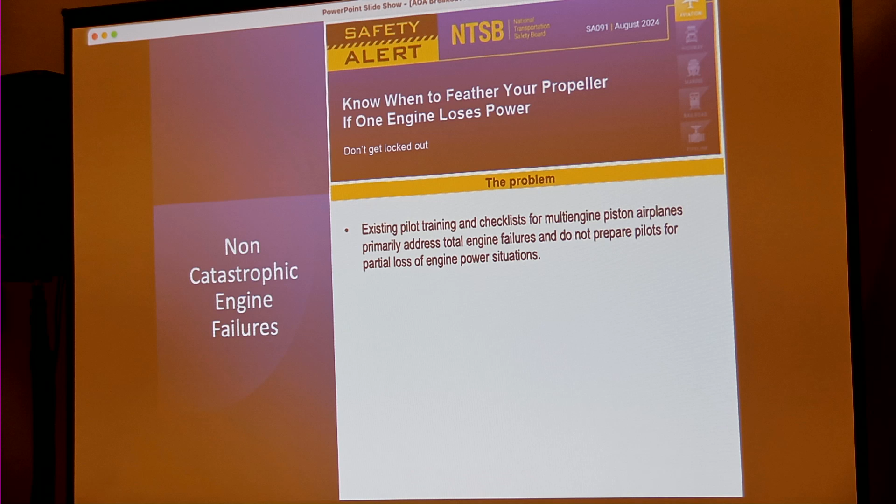Again, like Joel's example. And the other thing that's kind of interesting, and I never really thought about this, but our propellers have start locks in them, so that when we shut the engines down and RPMs drop down, according to the Hartzell manual, it's about 800 RPM. When that RPM drops below 800, it won't go into feather. Otherwise, every time we shut down, the props would go into feather.

Well, what happens if you have an engine failure situation where the prop is slowing down for whatever reason? It doesn't matter what, but it's slowing down — you better feather that thing before you reach that 800 RPM, otherwise you can't. And that's not going to be good in an engine failure situation.

Delayed propeller feathering and a partial loss can be pretty dangerous. Recently there was a Cessna 310 in Southern California that crashed and burned, but the occupants made it out okay. That guy lost an engine, never put the gear up, never put the flaps up, never feathered the engine. If he had, he would have been able to fly around the pattern and land it safely. Why he didn't? Probably lack of practice, and he just froze.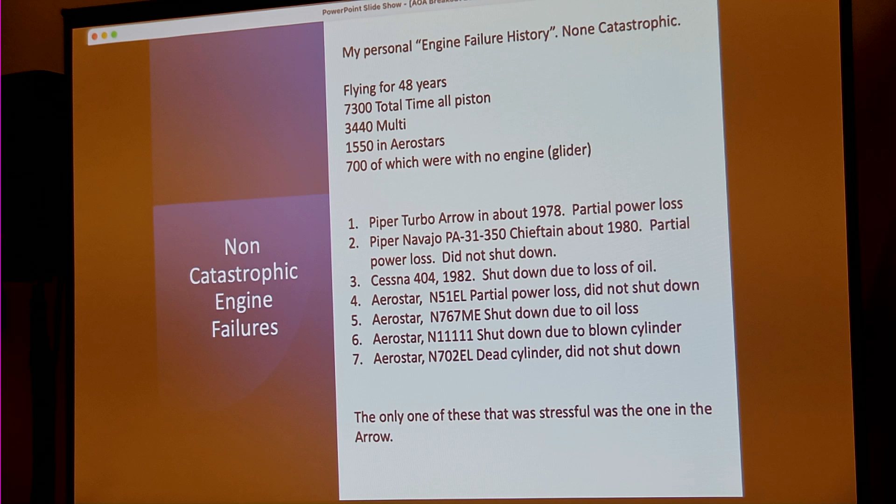So this was August 10th last year. New client, first flight in his Aerostar. He's a 767 captain, so lots of experience, lots of GA experience. Nothing wrong that he was doing, but new airplane, new avionics - an Insight G4 engine analyzer, which I've used before but not in a lot of detail. They're fairly small, hard to read. He had never used it, so he wasn't even really looking at it. He was concentrating on flying the airplane.

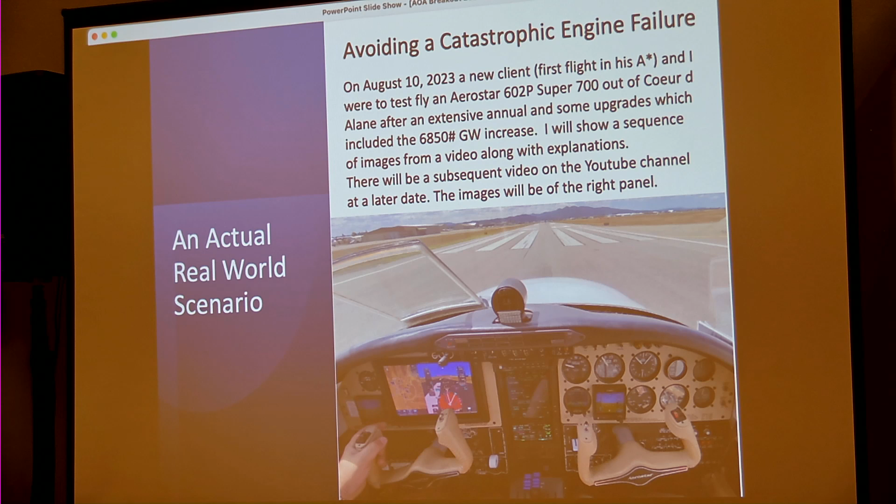So what I did is I took - this is actually all videoed, and I will make a video of this, it's in 4K so it's pretty good - I took screenshots at different times during the flight so you could see what we could have seen with the engine analyzer to figure out what was going on earlier than we actually found it.

So this is the first takeoff, and I want you to pay attention to the bars on the Insight. So we're looking at the left engine, right engine. Everything doesn't look too out of whack here, pretty straightforward. So this was the first takeoff.

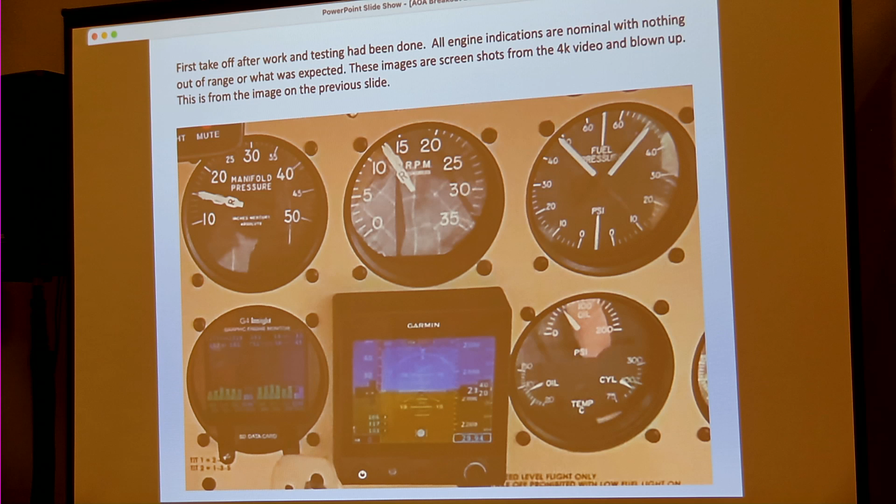Hadn't been flown for quite a while. The Aerostar had done all the full power run-ups, and everything was good to go - it was dialed in pretty darn good. And did the takeoff. So we're here, we're at just about full power.

Again, looking at the analyzer, both TITs on each side are pretty good. The CHTs all look normal. This is one of my gripes about the Insight - the EGT bars are hard to see because they're small and gray. One thing that the previous owner of this airplane did, or somebody did, they actually wrote down the TIT 1 and 2, and they've got it down below the analyzer.

So, okay, what cylinders am I looking at? And I thought that was a really great idea. How many of you really know, okay, what cylinders or what bank, left or right, am I looking at with that TIT? And that comes into play in troubleshooting when you're going through some of this stuff.

Climbing out, we decided to climb to 6,500 feet where we're going to do our air work. So normal 70% power settings at 37 inches and 2,400 RPM. Look at the fuel flow, which you can't see on here, but 37 gallons per hour per side - but actually you can, it's on the Insight. I think it's like 37.3 and 37.1, so they're very, very close. Everything looks pretty nominal. This airplane, the CHTs aren't as even as the ones on the right, but that's not a big deal here.

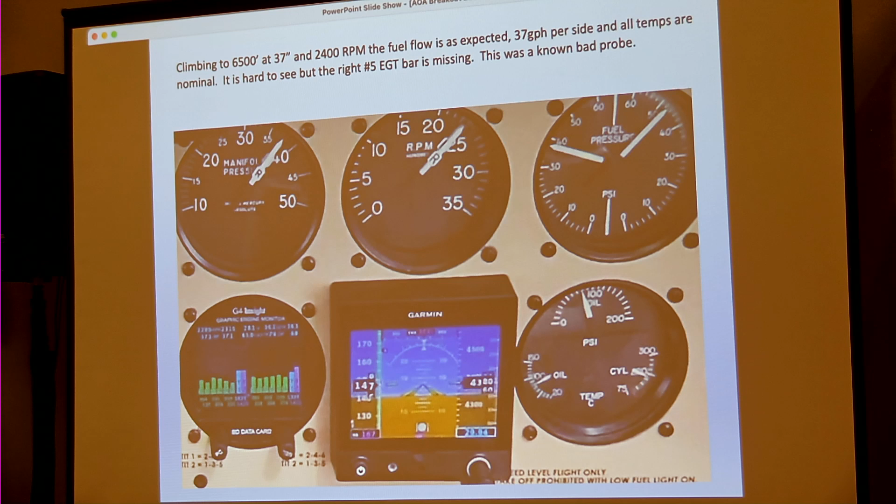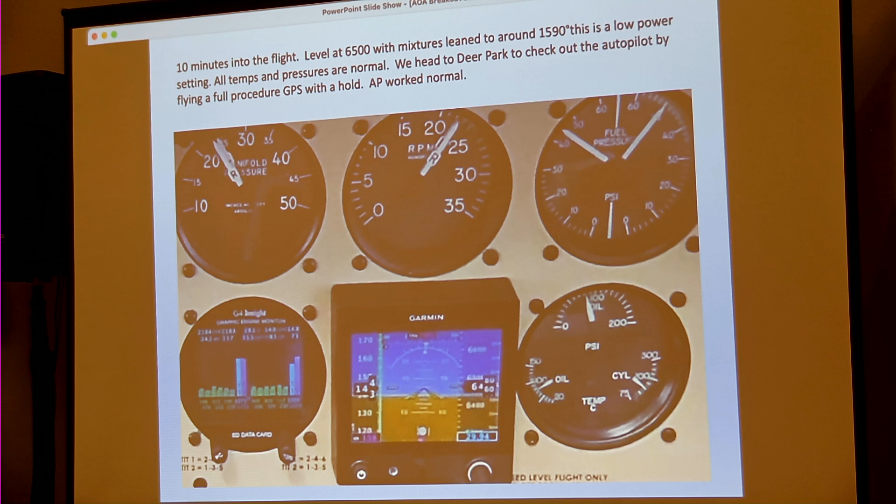So 10 minutes into the flight, we're level at 6,500. Mixtures are now leaned. We're at about 24 inches and 2,200 RPM, so a pretty low power setting, which I typically use when we're cruising around doing training. And the EGTs were up around 1590. So everything's looking pretty nominal. The 1 and 2 on the left engine are pretty close, and 1 and 2 on the right are pretty close - nothing to be concerned about at that point in time.

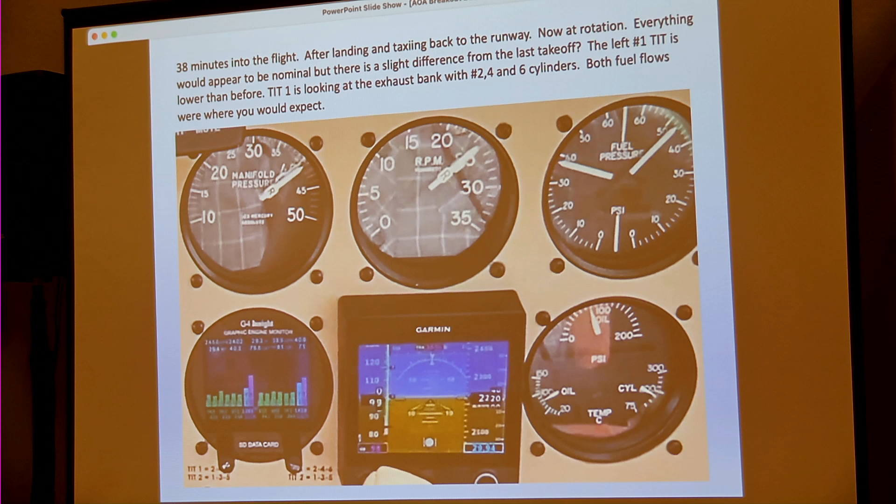So 38 minutes into the flight, and we'd been doing some instrument work and holds and stuff like that. After landing and taxiing back to the runway, now at rotation, this is what we see. Still pretty nominal, except that what's different here? Yeah, the TIT 1 and 2 on the left engine are different - they're not even like they were before. Again, at this stage of the game, nothing to really raise a concern, although I noticed it.

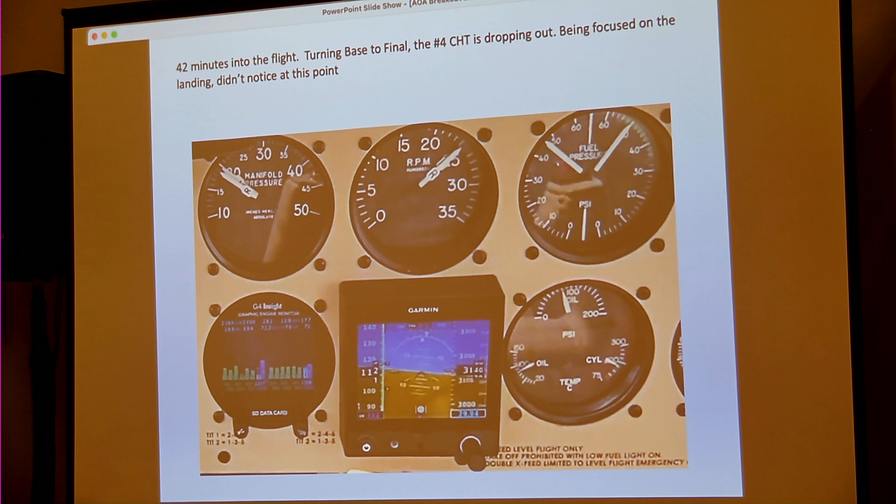At this point in time, because these were the first landings the new owners were doing, I'm focused on performance of the airplane, what he's doing, speeds, all that kind of stuff, which he was doing fine. Not noticing at this time number 4. But this was a warning sign.

Further on into the flight, we're lined up on the runway, ready to go, look down and check everything, and everything looks nominal again on the insight. So one little thing got missed, and it's changed again.

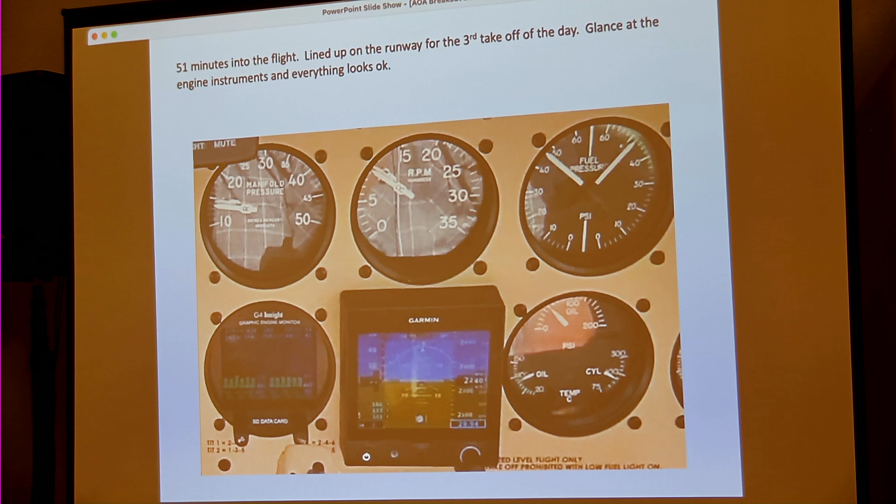So now, after liftoff, gear's coming up. Now we see CHT4's back up again, and TIT's down. So something's changing, and this is about the time when I started noticing I better kind of look at this stuff because it's changing. I didn't know what was going on, just stuff's moving around.

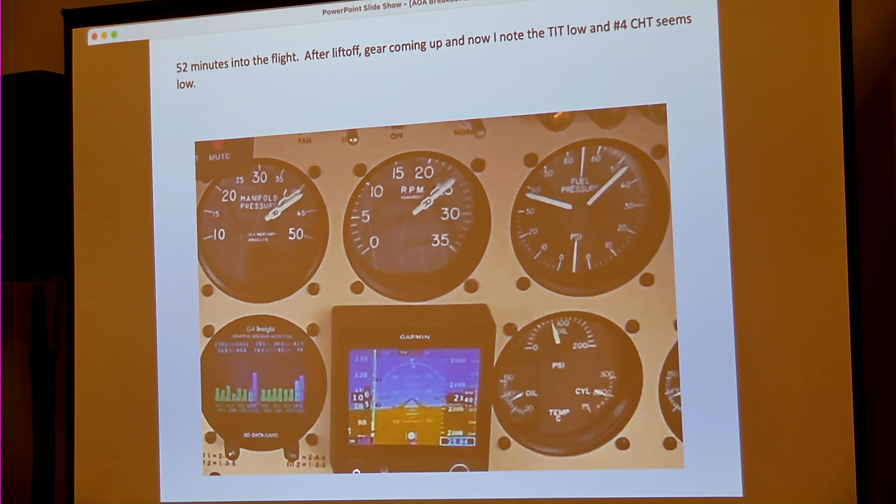It shouldn't be. So 54 minutes into the flight on base leg, now we're getting set up to go land again. Now I really notice it, and number 4's dropped out. The TIT's down on that side as well. What the heck's going on?

So I'm just going to watch it really carefully. We're continuing to fly this pattern, and then at this point in time, we're on base leg. And I looked at this and I said to Todd, hey, I don't like this, let's go back to Coeur d'Alene.

So we're already at a kind of a cruise power setting, so we pretty much stayed here. We climbed up a little bit and decided to just continue back home. It was running okay, it wasn't running rough, never felt anything, and went back to Aerostar and landed.

And this is the good picture that I took with the still camera. So you can see the number 4 is low on the CHT. There's no EGT even registering. Temperature's way down, TIT's down, and then the mechanical TIT gauges that were in the airplane, you can kind of figure out just by looking at how they are relative to the TIT temperatures. Looks like the one on the left is the number 1 TIT position, and same thing for the right engine.

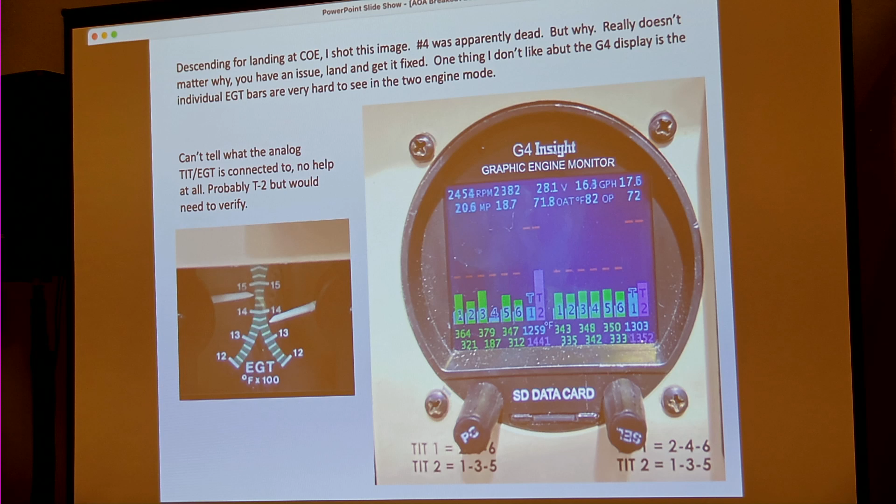So back at Aerostar, go through the normal stuff. Okay, engine's running fine, number 4 drops out, and of course we have all kinds of other things like valve springs that we've seen issues with before with Bill Ulrich's airplane. So they go through the normal stuff. Okay, compression's good, and look at the fuel injectors. The fuel injectors were okay. And there was a bunch of other stuff that I can't remember. I know Bill or Jim Christie was there when we were doing this.

And then they pulled a rocker cover off after we'd left and found that rocker, you could just move it. It was just free. So the whole valve train on that side had something going on. And then, I don't know, when you guys opened that up, I think you found some pretty big chunks of metal in there.

And the cam had started to come apart between 3 and 4. There's a common lobe, and I don't know whether it's the exhaust valve or intake valve, doesn't really matter, but it was coming apart. But the weird thing, and I don't know the answer to this one, is on that right picture, that's the case up between 1 and 2 on the number 2 side, so it's left side. That's something got pushed up into it from the inside.

And we're thinking later on, this cam's coming apart, there's big chunks of metal floating around in the engine. How much longer would that engine have lasted before it really started to come apart? And there's the question about, is this one of those cases that, we're at a safe altitude, we're close to the home base, is this one of those situations where we should have caged it and just landed? I don't know. There's a lot of judgment calls in to cage or not to cage. And where do you go from here?

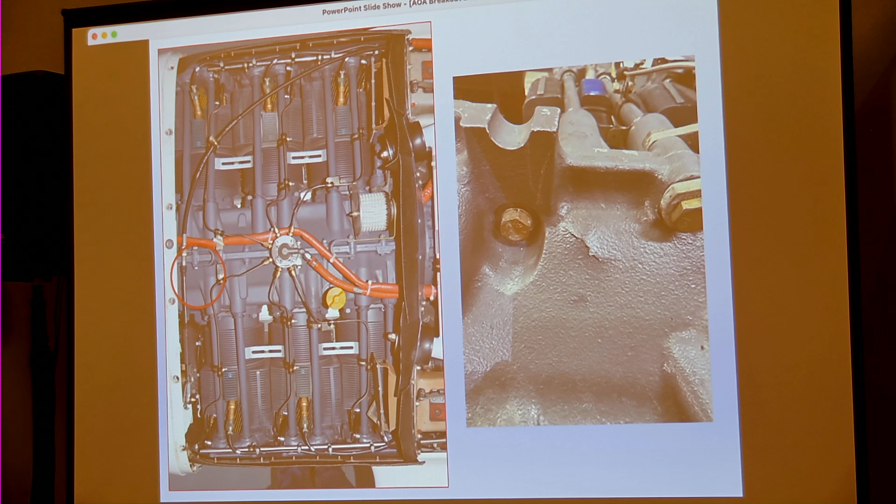I don't know. But it was interesting. I'd be really curious to see what that engine looks like taken apart, to see what actually did fail. And that, I think I made that in an hour.

Mr. Ulrich mentioned the fuel pressure on the left engine was a lot lower than the right engine. I would wonder about that. It looked like it was running about 10, above the green line. But having had a dual fuel pump failure in my career, you can see it's running at 40 and the other at 50, a bigger difference in a couple other slides.

Yeah, it's down to 38 there, and that's at full power. I can't answer that from a maintenance standpoint, but what I've learned is I like to see about 43 on both sides. I think these are probably fine. They're hard to adjust, but they can be adjusted and matched.